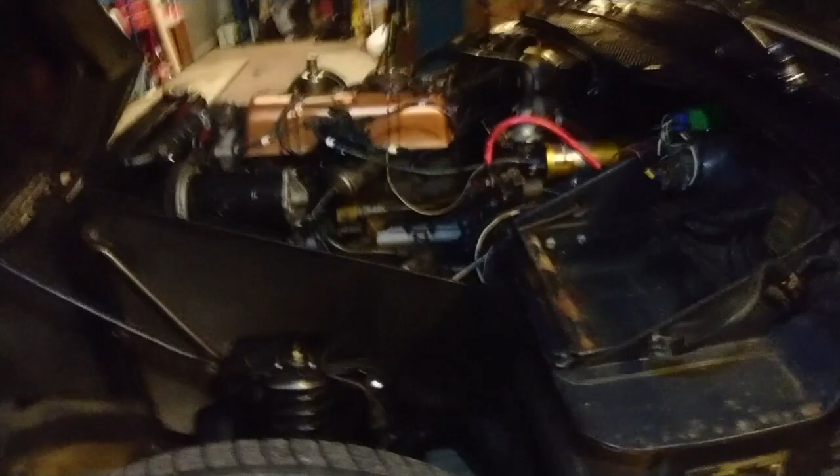I'm going to go and have a go at this starter motor, which is fairly conveniently located, because everything's convenient with this Spitfire, down there. But I've got a side panel - you can see the engine cowling panel in the way, which I'll need to take off. So the side panel's nearly off, and these things are a bit of a pain in the arse.

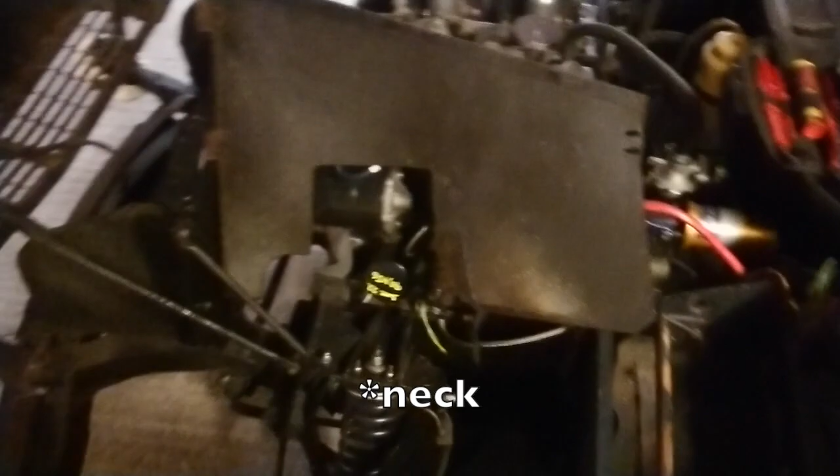Anyway, taking it off has reminded me of this terrible thing I've done, which I criticise other people for - complete lack of colour coding. This is like a supplementary earth for the adjustable oil pressure switch, which doesn't earth through the body, so it needed a separate wire running. This was something I cobbled together, so I'll take this opportunity to turn that into a black wire, because it's an earth.

Anyway, I think from here I can get the starter motor off without having to crawl under the car. Yeah, I think so. I'm going to get my 9/16 AF spanner and socket. It's going to be a bit of a wiggle, isn't it, because this oil pressure T-piece is slightly in the way.

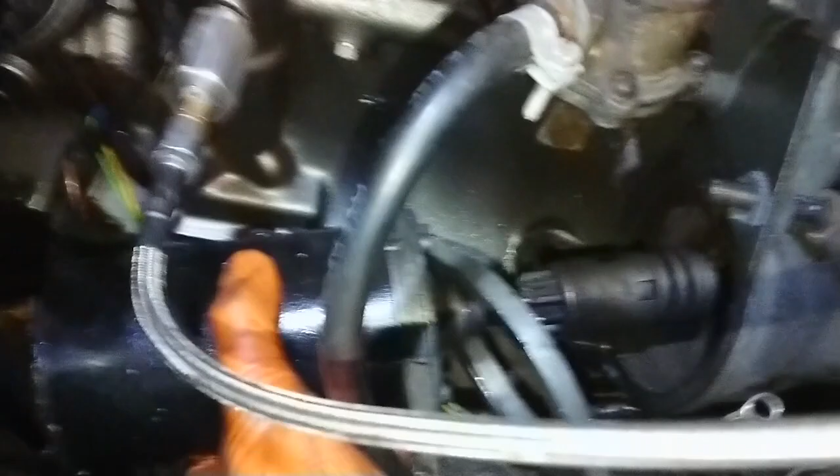Let's see. So yeah, as suspected - is that in focus? Just about, sorry about the wobbly camera work. I can't get this out, I'm going to have to take the... it won't come. It looks like it will, looks like it will, but it won't. So I'm going to have to take the oil pressure takeoff out.

Okay, she's out. I didn't have to take the whole T-piece off, I just removed the pressure line and put a nice little yellow plug in the end. Must remember that's there, must remember to reconnect the thing properly. So here's my starter motor - let's get it on the bench and see what's what.

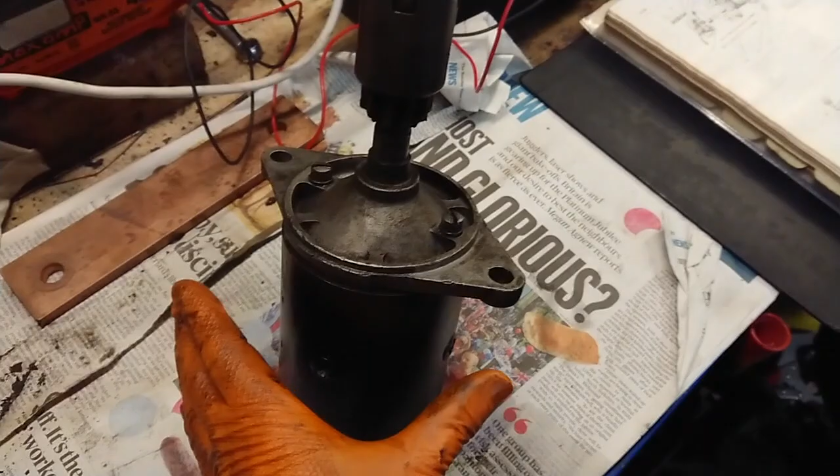The good thing is it's quite clean. This looks quite similar to a dynamo, and on a dynamo you remove these two big screws, and then you can basically withdraw the armature and leave the bit that rotates, leaving the casing behind and whatnot. Don't think it's going to be quite the same.

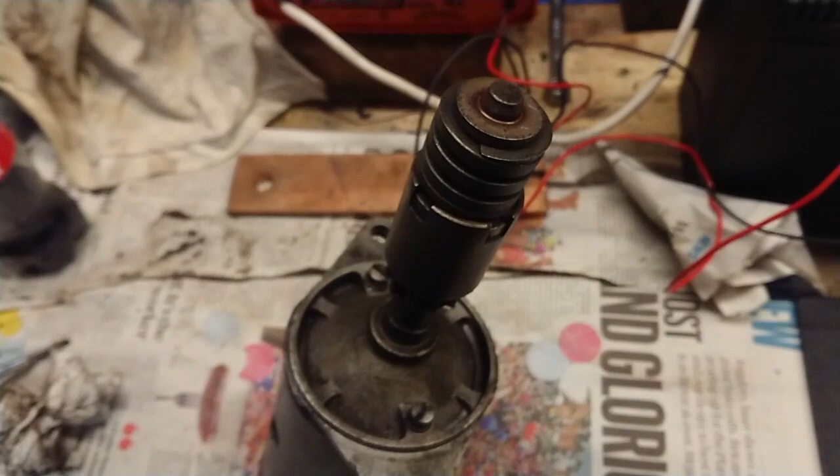The manual says I've got to remove - there's a clip here holding the sort of Bendix gear and whatnot on, but to get that off I need to compress this spring. Bit of a pain in the arse. So I'm going to see what happens - I'm going to take these screws out, and also take this rear cover off if I can. Yeah, we shall see.

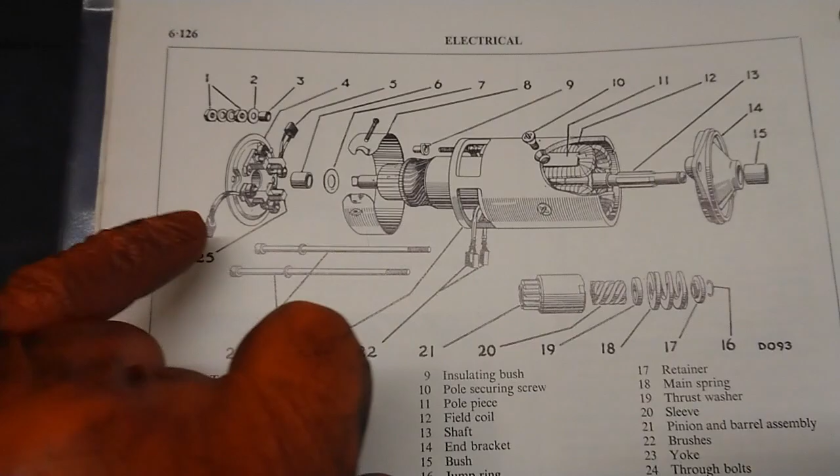It might be one of those things that I start and then can't get the brushes, because there's some brushes in there. According to the drawing it's slightly different from mine because it's got a ring around it. Anyway, mine's not the same as this, but this has got two sets of brushes - a set here and a set here. So I'm intrigued, we will see. This is a voyage of discovery. Let's have a look.

You didn't need to know that. That was completely pointless information.

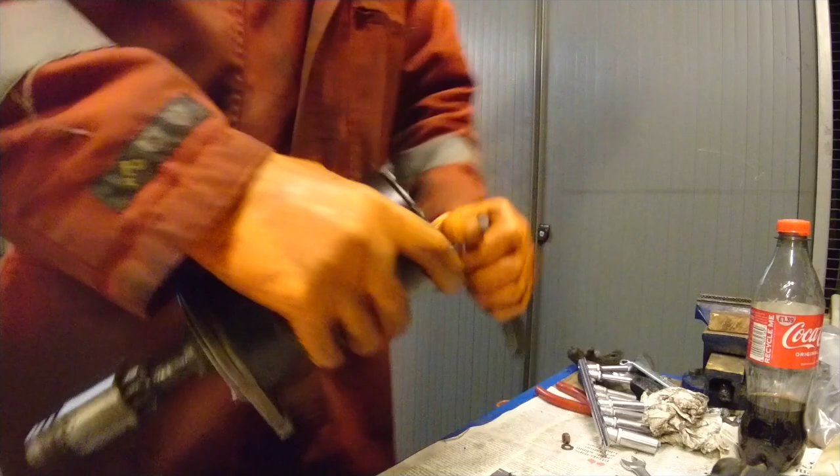So these little screws - well, I'm using a 7/32 socket and it's a little bit loose, so I don't know what the right size is. Maybe Whitworth? Lucas would probably do something like Whitworth. Anyway, I've got a feeling it's springing off. It's going to come flying off, and loads of bits are going to go flying, which would be hilarious.

Yeah, but the angle's not very good then, is it? Well, no, the angle's not very good. Sorry about that.

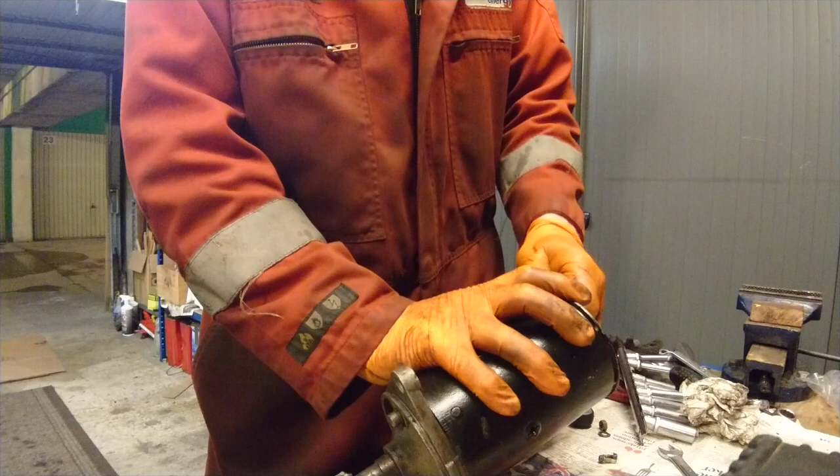Alright, 1, 2, 3, and the last one. I've left a nut on the main 12 volt post there, just in case it did want to fly off. Okay, haha, that's sort of what I was expecting to happen, but not entirely.

See, I thought this plate would come off, but no, it doesn't come off. So it goes that far. Obviously, then it stops.

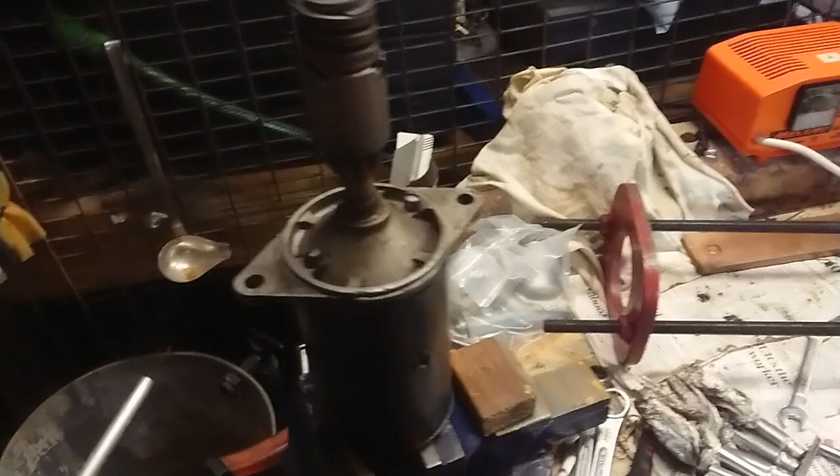I'm gonna have a bit of a play around and see what I can do. I've had a bit more of a thought about it, well, I had a bit more of a look at it. I think I'm going to attempt to take this off as per the workshop manual.

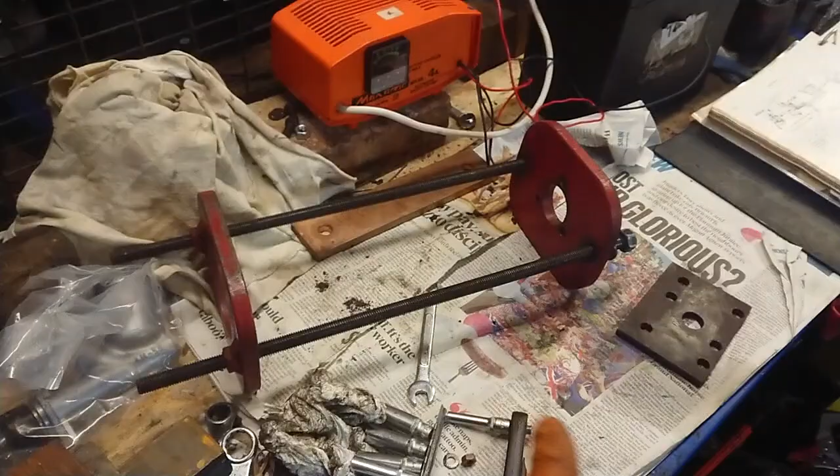So I've got to compress this spring, and I thought, well, how am I going to do that? Maybe I'll use my spring compressor - this is obviously for suspension. And I looked in my scrap pile for some suitable piece of metal, because the hole in the top is too big.

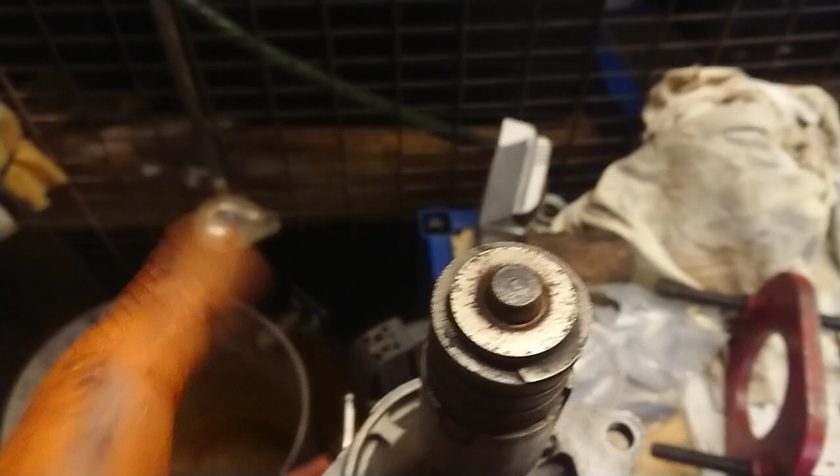If you know what I mean, it slides straight over. So I'm going to put this here. Is that going to fit? Will that fit in there? Yes, it will. So I'm going to wind it down, and then see.

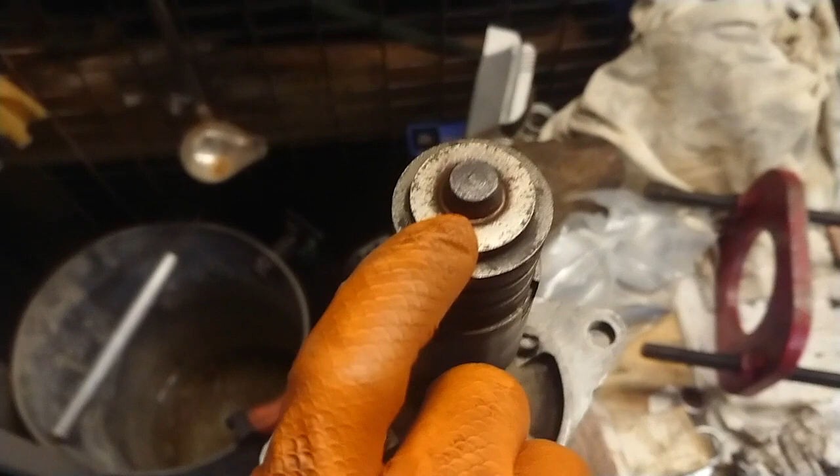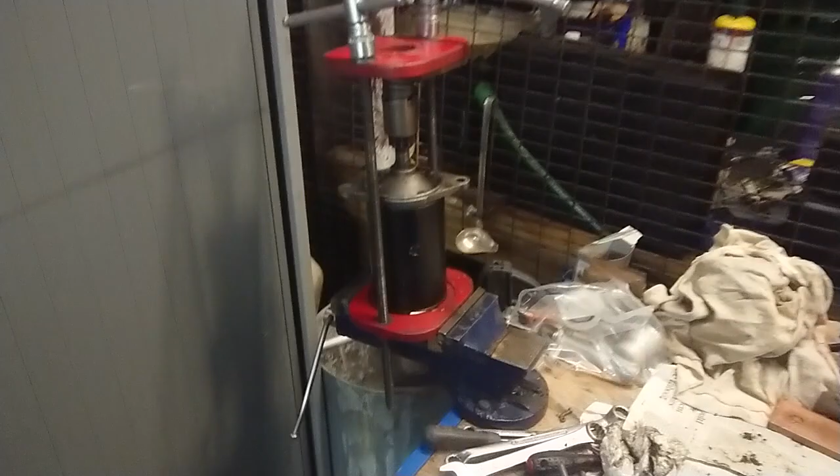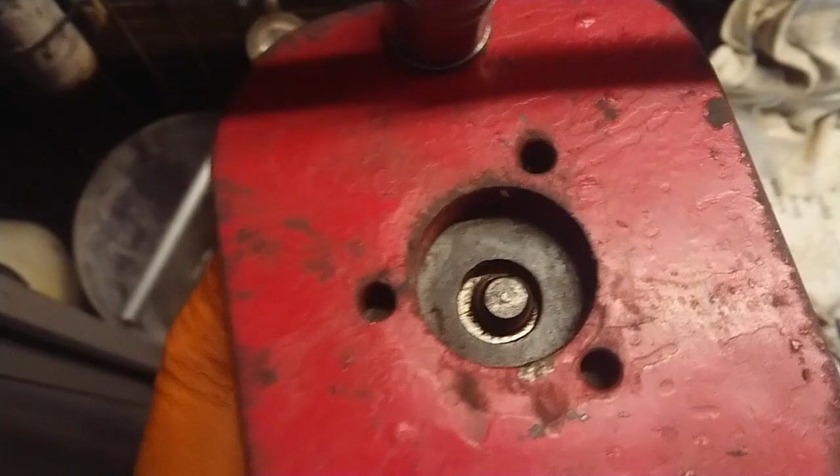Here's the setup then: spring compressor, clamped in vise, standing on some blocks of wood, and my little spacer plate is sitting there. I've got a couple of sockets, and I'm going to wind it down, and we'll see what happens. Have I said I'll see what happens several times?

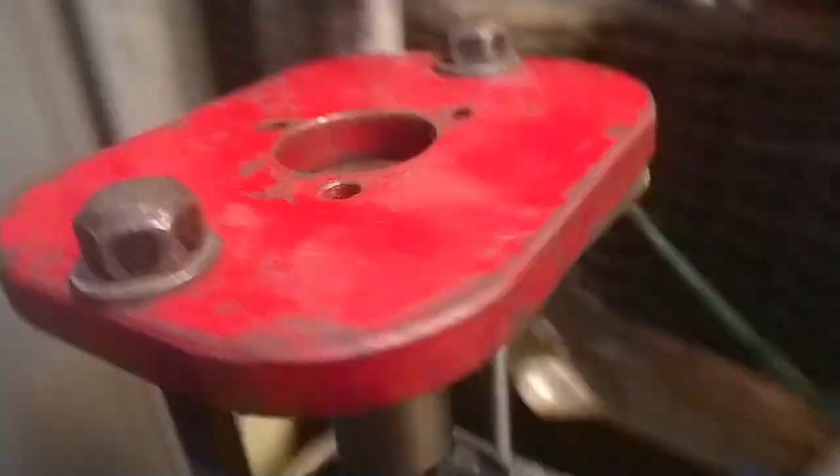That's what's happening anyway. So, a slight difficulty now has arisen. I've got it compressed, I think that's as far as it's going to go. So that thing called the jump ring - here's my screwdriver - the thing called the jump ring, it's got a little split, so it's a little circlip type thing.

Now, what I'm going to do is try and wedge one screwdriver in the gap, open it out, and then use another screwdriver to lever the thing off, and hopefully it doesn't go flying off into my neighbour's garage or anything like that. But obviously that's a two-handed job.

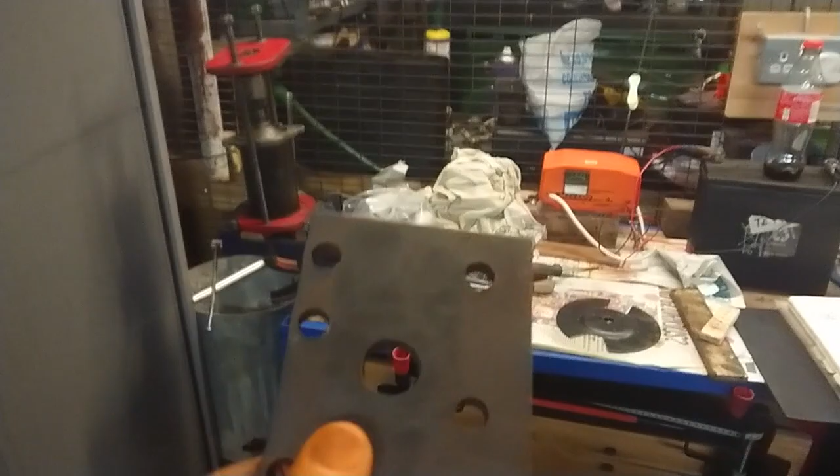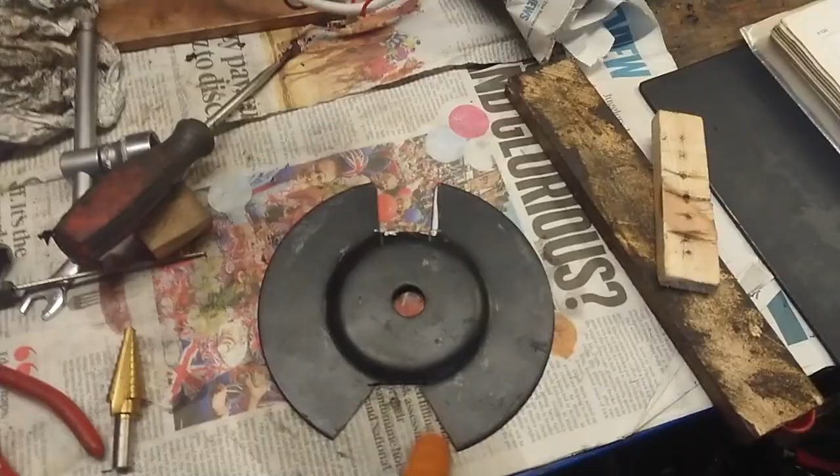Alright, well, this thing is too thick, can't get underneath - I need to get underneath that little ring to be able to prise it off. So I've got something thinner. This, I think, used to be part of a lamp anyway, so I've cut some slits in it so it will fit. But I want it to sit on top.

I want it to sit on top of here, so I can get my screwdrivers underneath the little ring. You'll see what I mean in a minute. So I'm going to drill 3 holes in here and bolt it to the top of the spring compressor plate. And then it's going to work, definitely. The holes line up, would you believe?

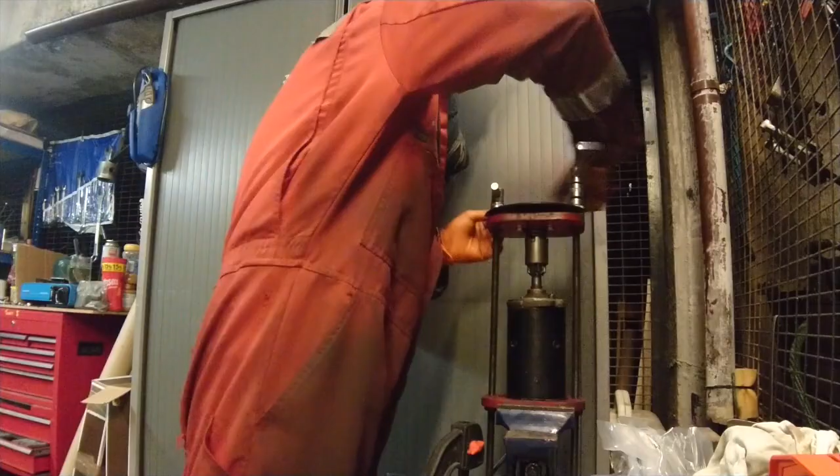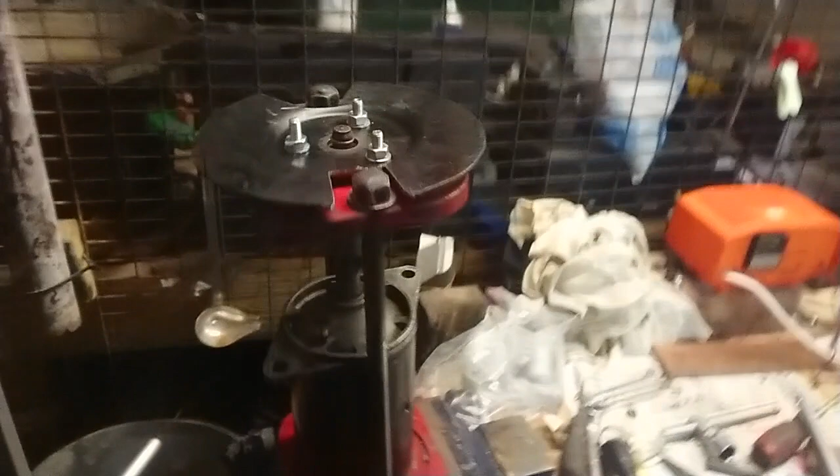That is compressed. Let's see, can you see that? Hang on a minute - there it is. And there's the jump ring. In a moment, that will be off.

I just want to demonstrate this 2 screwdriver technique. You can use one of the bolts as a fulcrum. It's still pretty awkward, I could do with a third hand, but basically I can squeeze that.

I mean, yeah, it does work. Ta-da! Told you it would work.

So now we know how to do it. Don't lose that, will you?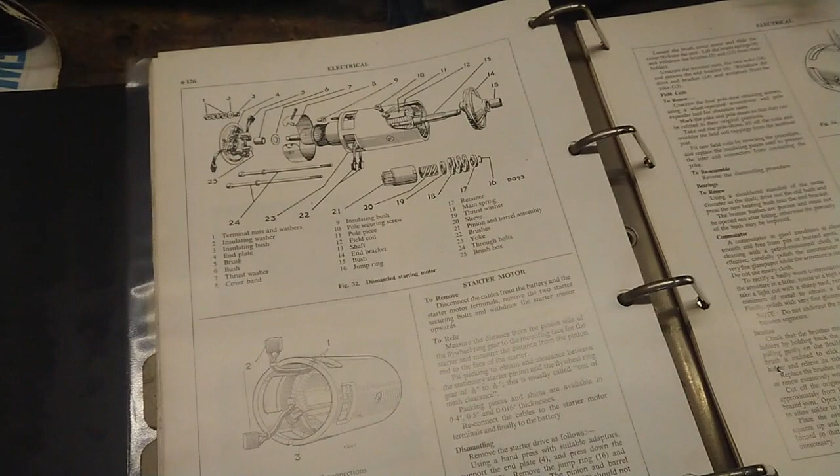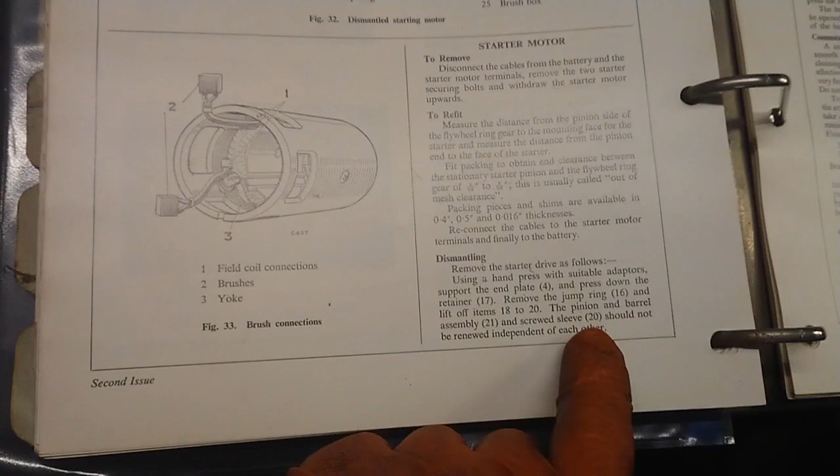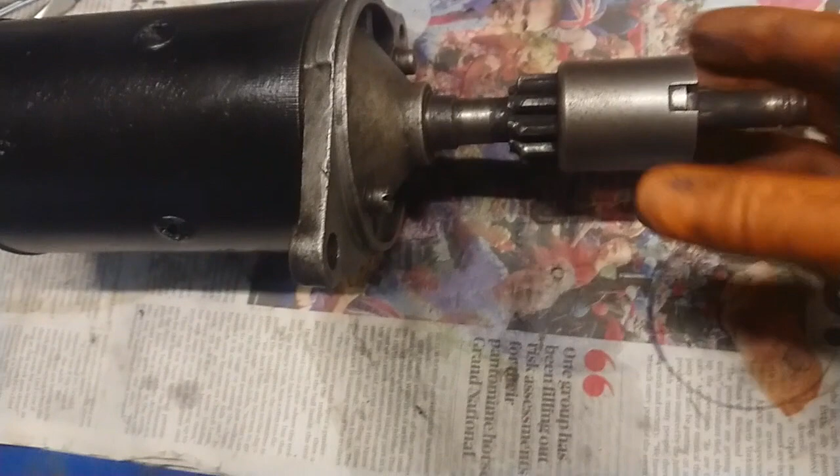Here she is then, and the workshop manual says once you've got that, remove the jump ring, like it's a trivial exercise, and lift off items 18 to 20. What about 21? It just says the pinion and barrel assembly should not be renewed independent of each other. But do they come off? I don't know, let's see. No, they don't, but that does. What's doing 18, 19 and 20, but not 21.

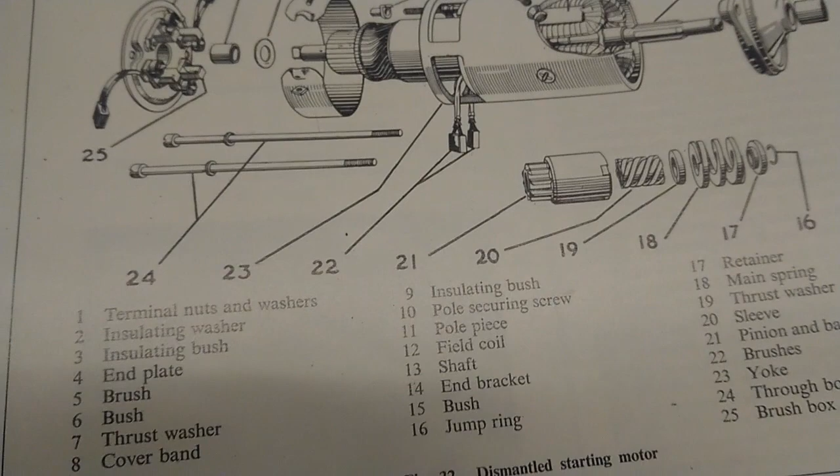Interesting, which way around did I just put this? That comes out like this. These came off like that. So let's put them face down. There we go. There you are, of course it comes off, you sod.

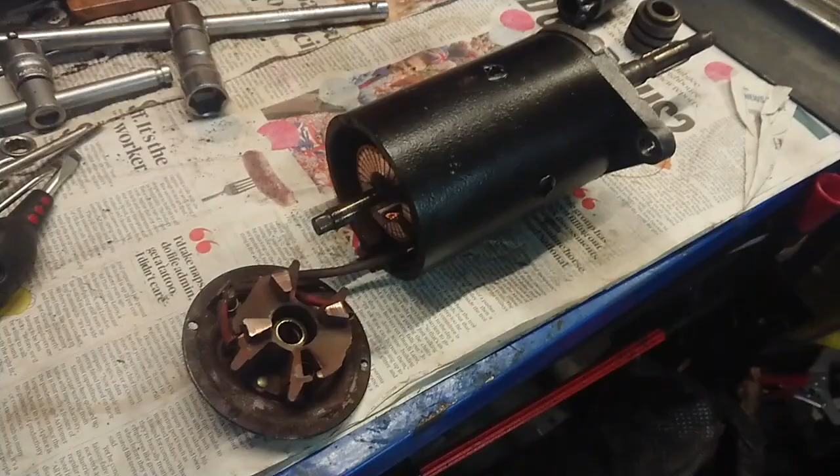That's it, let's see. Now I'll take those screws out of that end again. Help, what have I done? So it did just, the back plate did just pull off. It's just a sliding fit on the shaft. So one of the field brushes has come out of its seat.

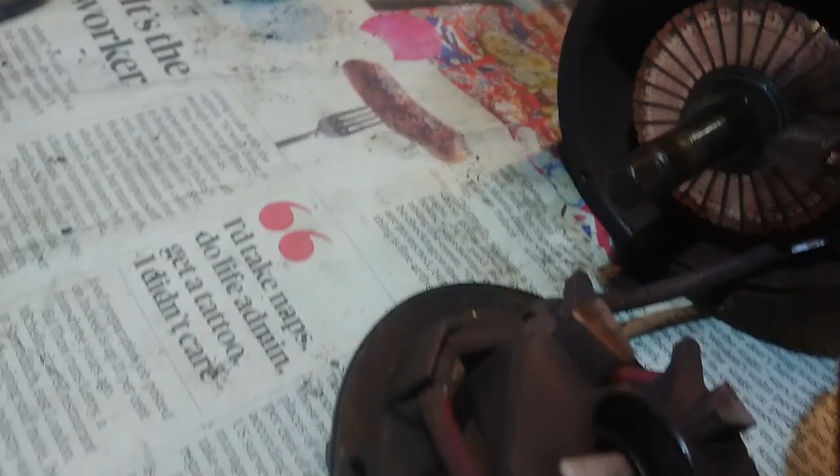Anyway, that's the commutator, and it looks fine. I was hoping it was going to be covered in soot or something, but I'm not sure. I don't know how long the brushes are meant to be. I'll look in the manual.

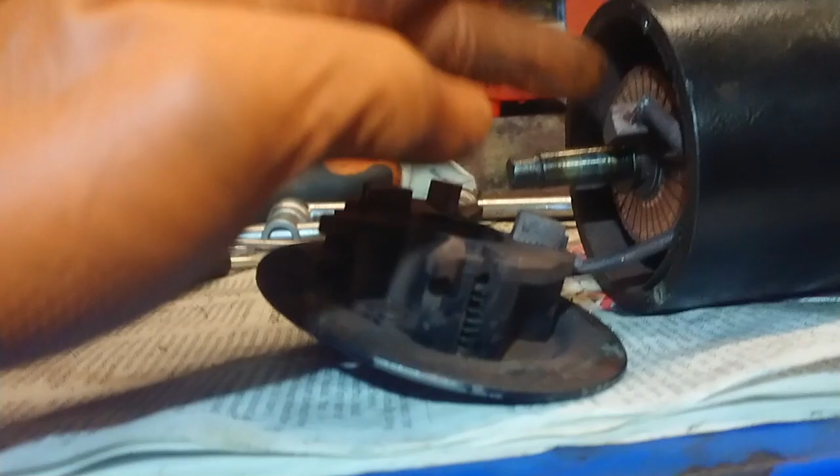Do they all move freely? That was one of the questions. They do, I presume. He moved so freely he escaped. So why didn't it work? It's a mystery. Maybe I'll just put it back together and hope for the best.

I took the armature out. That's this bit. And here's the base plate with the brushes. And I thought, I wonder if those brushes are the right length. In the manual it says...

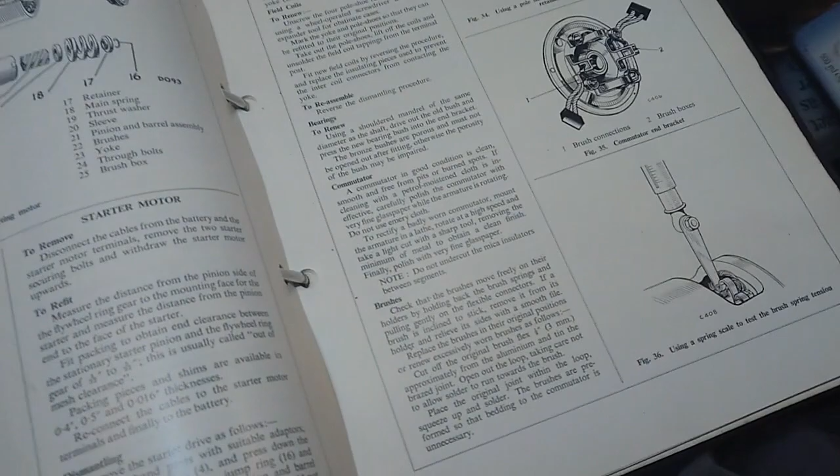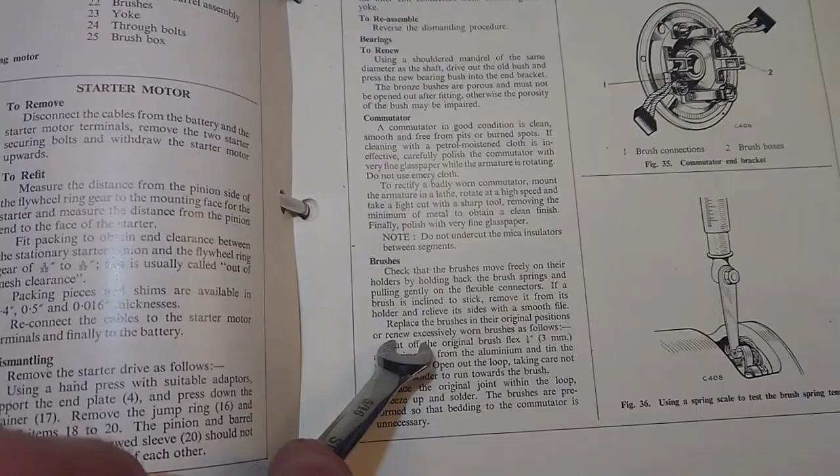Check that the brushes move freely on their holders. If a brush is inclined to stick, remove it from its holder and relieve its sides with a file. Replace the brushes in their original positions, or renew excessively worn brushes as follows. Excessively worn is in the tech specs bit, and it says minimum brush length...

5/16, 8mm, 5/16 of an inch. Here's my 5/16 spanner. And the brushes, let's take one as an example - that one will do. Whoopsie daisy, there you go. Well, it's lots more than 5/16. Interestingly, vaguely interestingly, the width of the brush is about 5/16 wide at its widest point.

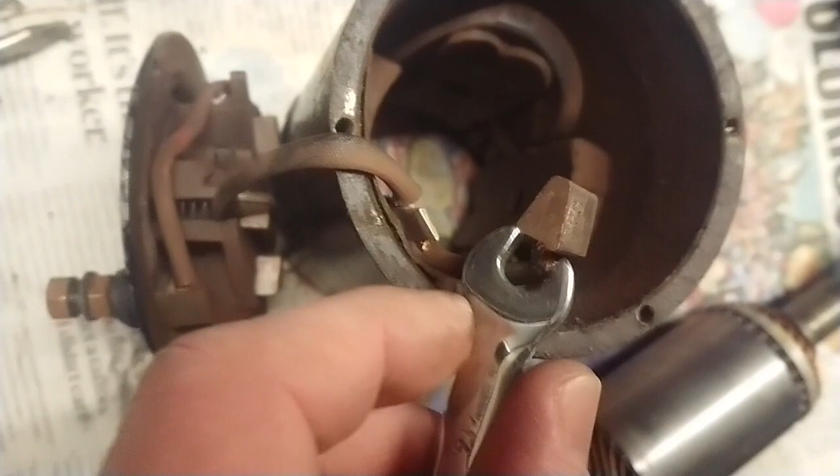And then on the commutator, if I can - I haven't got enough hands. Is that going to stay there? Not for very long. So you can see that each brush, at any time, is on 2 segments of the commutator, just for interest.

The commutator is a bit worn. I mean, the starter motor, it's nothing like the dynamo in terms of wearing brushes and commutator, because the dynamo is obviously running all the time the engine's running, but a starter motor only spins a little bit every now and then when your car conks out and you're trying to restart it. So the fact that this is 55, probably 54 years old, I'm not surprised the brushes aren't worn out.

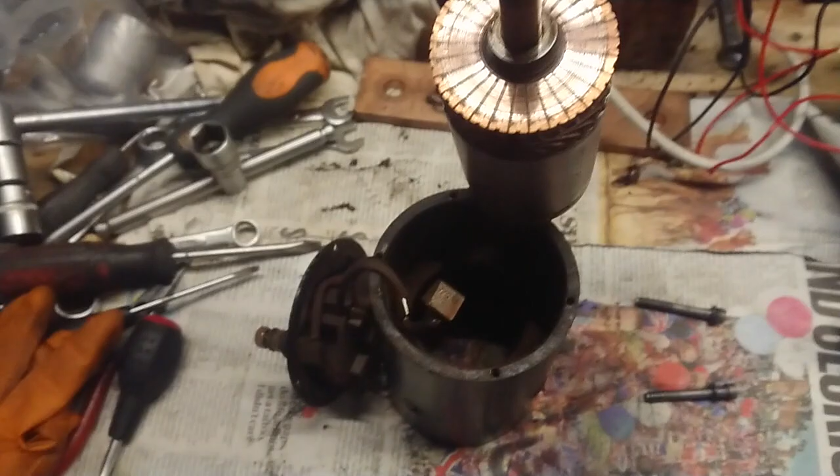What I'm going to do is clean this up. I'll just give it a wipe down with some wet and dry or wire wool, because maybe something was going on, I don't know. It looks fine, and the brushes are the right length. So I'm going to give this a clean up.

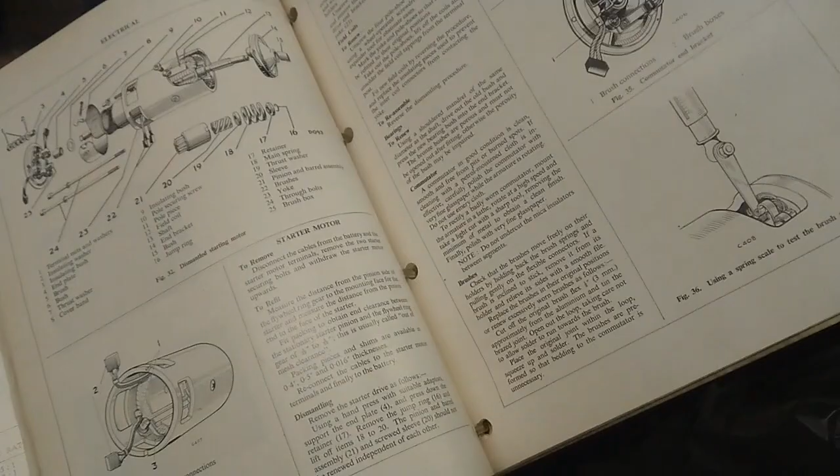And then I'm going to do what the manual says, which is reassemble. To reassemble, reverse the dismantling procedure. What could be simpler? One last thing before I put it back together.

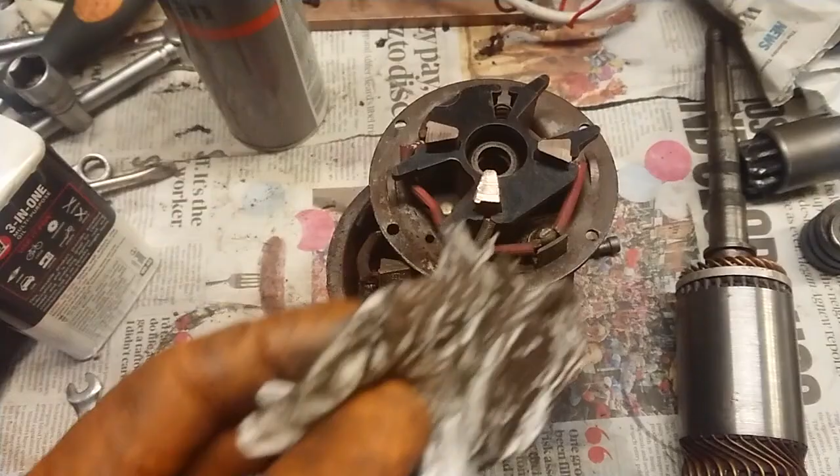You can tell that everything was covered in quite a thick layer of copper dust. So I'm trying to wipe most of that off with a bit of rag, carb cleaner, paintbrush to flick the dust off. I did clean the commutator and the end cap.

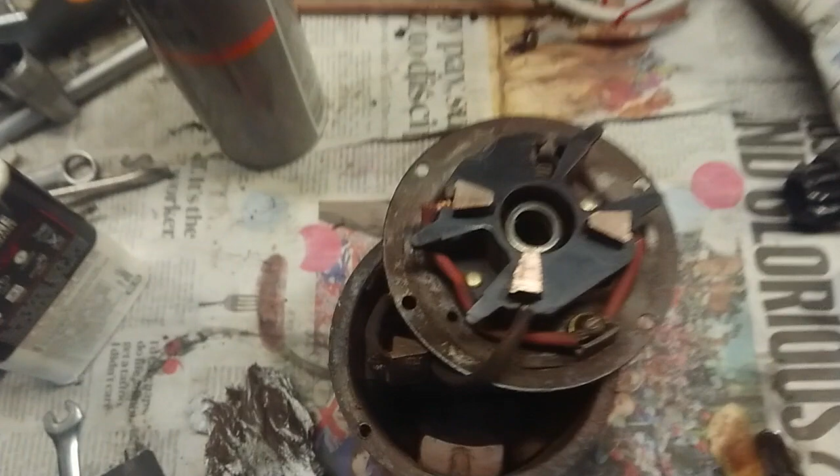I mean, it's quite worn. You see a lot of grooves, but you would think that the brushes have worn in the same way. So ideally everything would be smooth and fine, but I haven't got the means to remove all the wear on this. Maybe you should have it refaced. If I had a lathe, maybe that's what I'd do. But I haven't got a lathe, so I'm not going to.

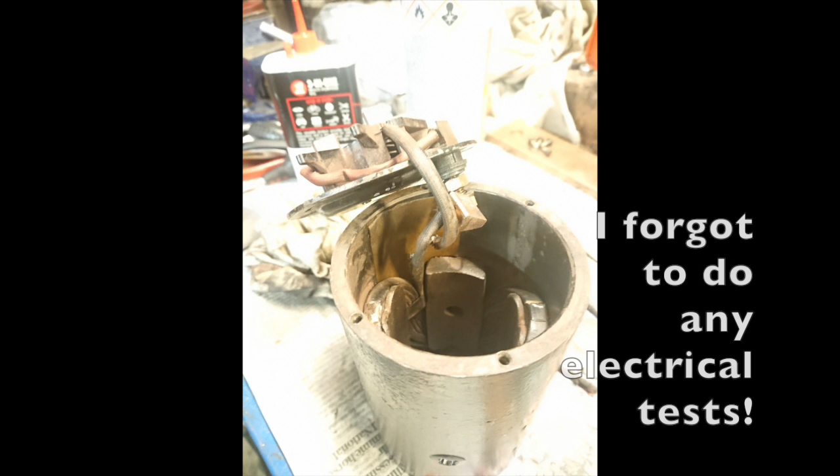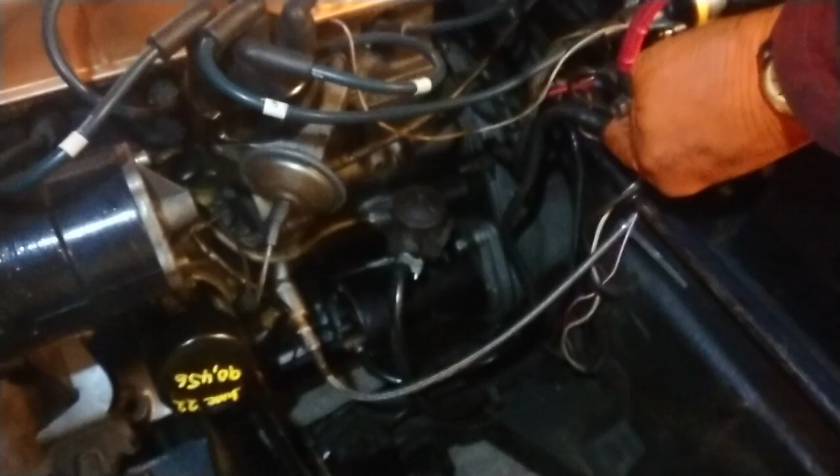Okay, well, it's back together. It was quite easy to put back together. It's back on, you can barely see it. There's the starter motor, and here's the solenoid. Is it gonna move? Is it gonna go? Yeah man, it works. I mean it worked before, but it's good that it works now.